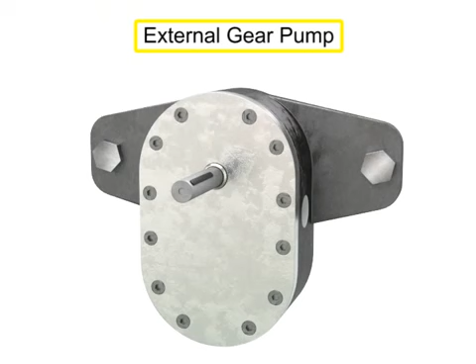Many different types of pumps exist to assist fluid movement in a variety of systems. An external gear pump uses two gears rotating against each other to provide fluid movement.

One gear is driven by a motor connected to a shaft. This is called the drive gear because it is driven by a motor, and it in turn meshes with and drives the movement of the second gear.

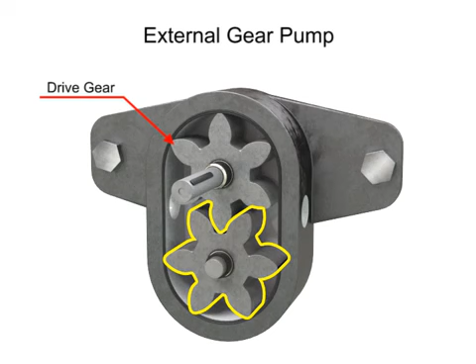As the gears rotate away from each other and come out of mesh, they create an expanding volume on the inlet side of the pump. This creates a vacuum at the inlet port, allowing fluid to flow into the pump. Then fluid flows into the cavities and is trapped by the gear teeth.

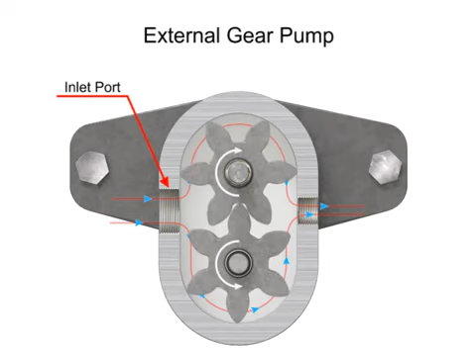As the gears rotate, a flow path is created around the outside of each one. Fluid trapped in the slots between teeth is carried around and discharged into the cavity with the outlet port. Meshing of the teeth in the center of the pump seals the outlet port from the inlet port. No fluid passes between the gears.

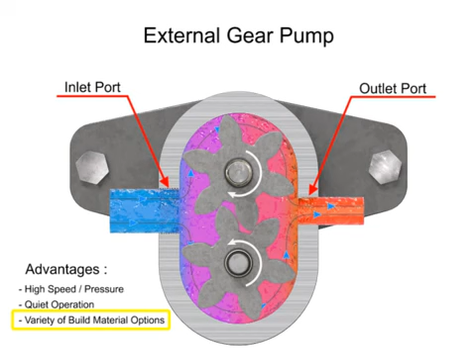The advantages of external gear pumps are their high speed and pressure, relatively quiet operation, and that their design accommodates a wide variety of materials. Disadvantages include bushings in the liquid area can become worn and that they have fixed end clearances.

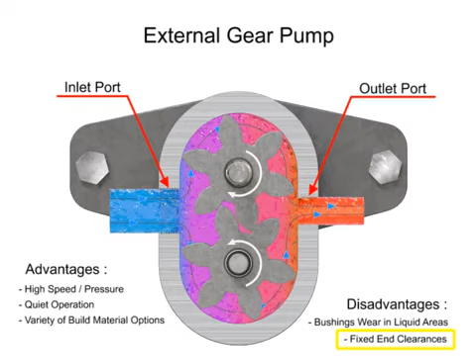Internal gear pumps are exceptionally versatile. This type of pump has one inner gear which is inside a second outer gear. The inner gear has a shaft driven by a motor and has teeth that protrude outward. The outer gear has teeth that protrude inward toward the center of the pump.

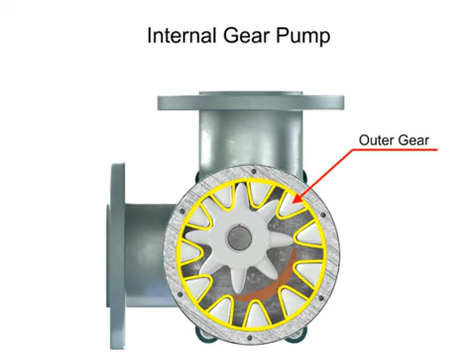As the inner gear rotates, it meshes with and moves the outer gear. Liquid is trapped in the gear spaces and carried from the inlet to the discharge. A stationary crescent-shaped divider separates the intake and discharge portions of the fluid.

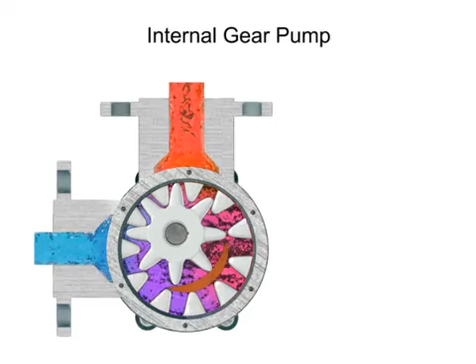Advantages of internal gear pumps are a smooth and almost pulseless flow, and slightly more horsepower for its size. Disadvantages are its higher cost, limited size range, low to moderate pressure ratings, and few sources of manufacture.

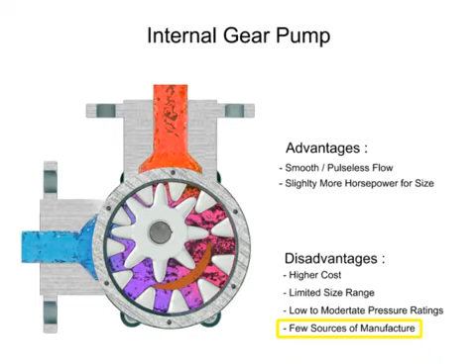A rotary vane pump is a positive displacement pump that consists of vanes mounted to a rotor. The vanes are on an off-center drive shaft. As the shaft rotates, the variable length vanes slide in and out to maintain contact with the pump housing. The tension in the vanes is maintained by either springs or hydraulic pressure.

As the vanes rotate, they create chambers of varying sizes within the pump. Fluid enters at the largest chamber. As the vanes rotate and retract, the chambers get smaller, forcing fluid to exit through the discharge port.

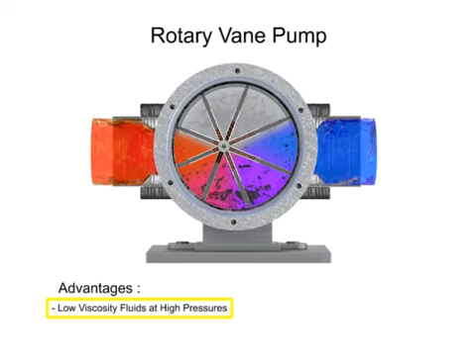The advantages of vane pumps are that they can handle low viscosity fluids at relatively higher pressures, can dry run for short periods, and develop a good vacuum. Their disadvantages include complexity and their unsuitability for both high pressure and high viscosity fluids.

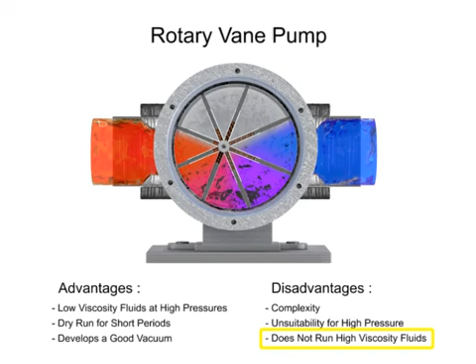Piston pumps come in many different forms. A swash plate is a device used to translate the motion of a rotating shaft into the reciprocating motion of a piston.

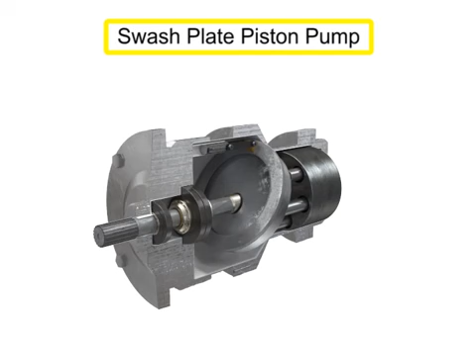Swash plate piston pumps have a rotating shaft connected to a cylinder block containing pistons, which are pressed against a stationary swash plate that sits at an angle to the cylinder. As the shaft rotates, the pistons move against the swash plate, causing them to reciprocate within the piston block.

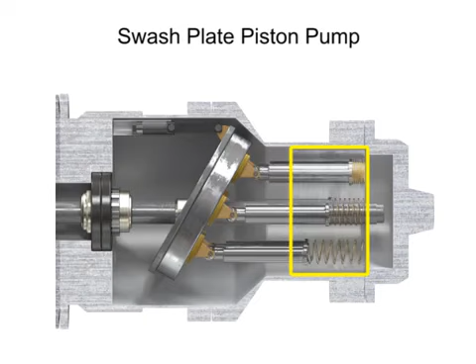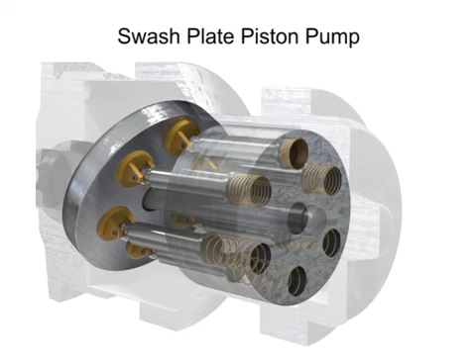The pistons create a vacuum that forces fluid in during half a revolution and expels fluid during the other half. On the intake stroke, a spring ensures the pistons pull back and maintain contact with the swash plate, causing fluid to fill the empty cavity left behind.

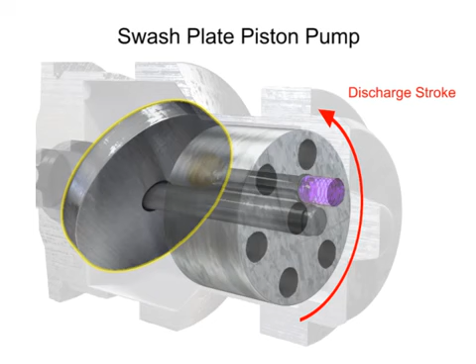On the discharge stroke, the angle of the swash plate forces the pistons back inside the piston block and discharges the fluid. The greater the slant on the swash plate, the further the pump pistons move and the more fluid they transfer.

Piston pumps, in general, are manufactured with closer internal fits than other pumps. This means that internal slippage can be less so that they operate with reasonable efficiency at pressures both too high or too low for the operation of other pumps.

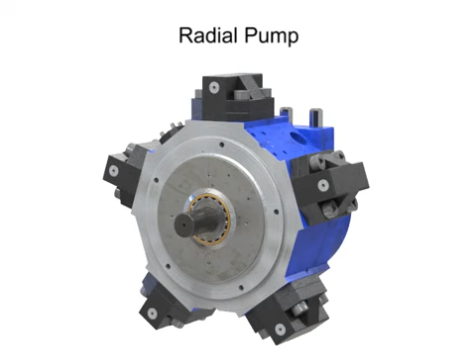Radial pumps are designed so the pistons stroke in a direction at right angles to the shaft. The pistons are arranged like wheel spokes around a cylinder block with an eccentric central cam mounted on a drive shaft.

As the shaft rotates, the cam moves towards the pistons, forcing them down into the cylinder block and discharging the fluid. As the cam moves away, springs help retract the piston and cause the intake stroke. Check valves ensure that fluid only enters the inlet ports and only exits the outlet ports.

Radial piston pumps have a low noise level, very high loads at low speeds, and high efficiency.

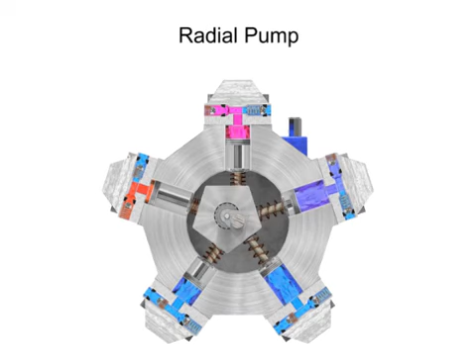Hand pumps are used when a source of power is not available or where the extra expense of a power pump isn't warranted. For example, they are used on shop presses and other portable equipment, serve as standby pumps, and serve as sources of emergency power.

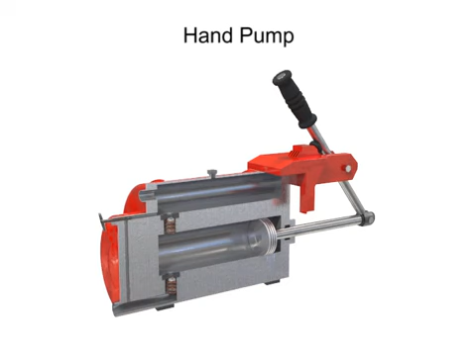Hand pumps are always of piston type and are usually constructed with a piston working between two check valves.

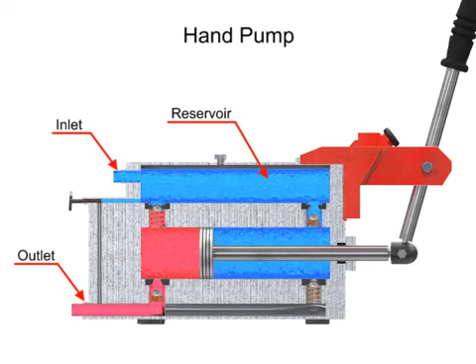Double-acting hand pumps are more efficient, allowing fluid to both enter and discharge on both strokes of the piston. Moving the pump handle in either direction allows fluid to be drawn in from the reservoir and discharged via the outlet ports. Check valves in all locations prevent fluid backflow.